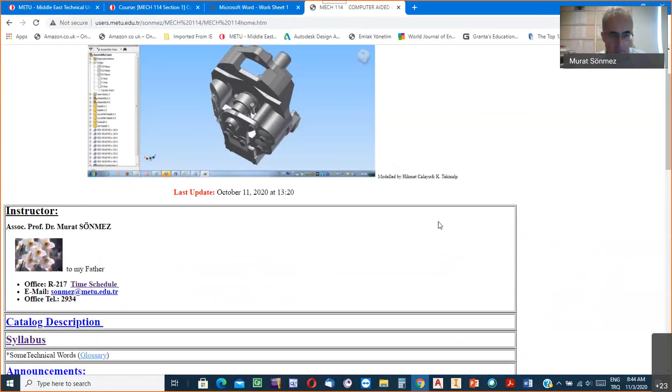Syllabus sheet, for instance. On the syllabus sheet there is a weekly program, showing in which week what subject is to be studied. Although in this table you see the chapter titled Sheet Metal Work is the last topic, in this table it is seen.

But last week I received a kind request from my elder students. They asked me, since during the summer practice internship in the company they worked on sheet metal works, and now they need to submit a summer practice report. In the report such works are to be explained, and at the appendix of the report the necessary drawings and developments are needed, and then they should be able to create the model of such works, the objects. These are in the jargon called sheet metal work.

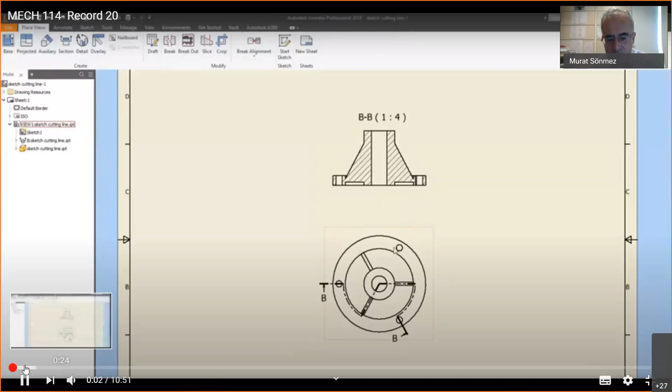No, not necessary, because the video records are accessible and available. No need to watch the video records in an online meeting under the control of Murat Hoca. But say this is a course.

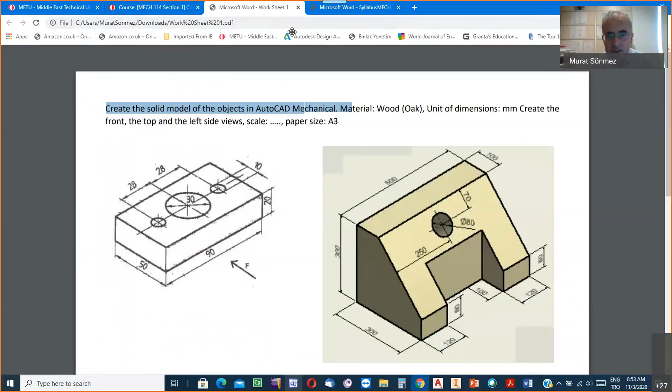It has in its catalog definition, you know, 4 contact hours. See the catalog definition one more time. ECTS credit 6, you know, 2 plus 2, 4 contact hours.

But since the course is a very crowded course, and unfortunately the university senate couldn't discuss its up-to-date content, some professors still think that engineering drawing, even today, is just the student using a pencil to draw projections - pen, paper, pencil drawing. Since they think that is the content, the main tool, the main domain, they say this credit is sufficient.

They don't know that we are using very commonly used professional software, and for students to be educated and learn the tools of such professional software, it requires extra time.

And since the student should learn the things not only in the first quadrant but also in the third quadrant, not only ISO standards but also American standards, the content is really crowded. Since 1989 it has been getting more crowded, but unfortunately decision makers have no idea about such content.

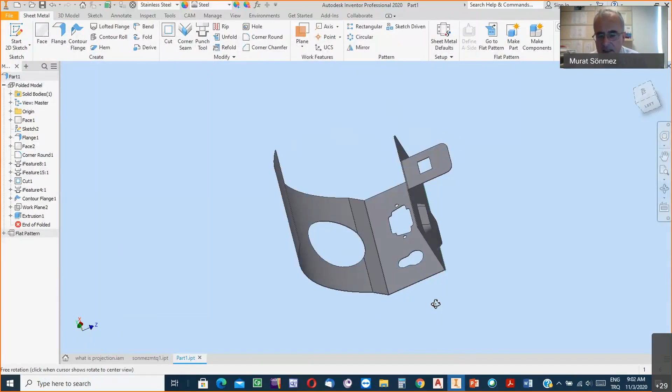Saying sheet metal work, let me directly give an example of what we mean. In Inventor, this is the model - a sheet metal work, it is a sheet metal work. This object in general may be a part of an automobile, or it may be used as a part of an aircraft structure, whatever it is. But in general it is called sheet metal work. In which case is an object called sheet metal work?

If it is the case that during manufacturing, first from the market or stock, you found in the corresponding stock size a rectangular prismatic sheet made of metal - most commonly we use steel. You found a rectangular prismatic sheet, take it, and put marks over the sheet. Then applying a punching process, create these empty spaces. Then using a press machine, create this feature, punch it. Then using the bending tools, bending machine, fold the sheet. This is a sheet.

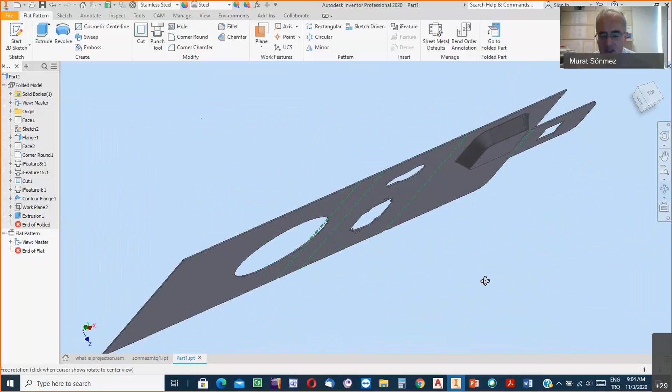By the way, when such a rectangular prismatic object is called a sheet, it is measured by the thickness. If the thickness of such a prismatic object with flat surfaces is less than 10, maximum equal to 10 millimeters, then it is called sheet. If the thickness of such a simple right prism is greater than 10, then it is called slab.

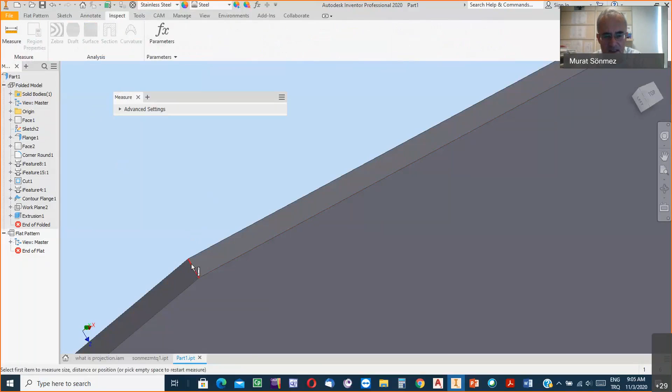Let's measure the thickness of this one using the inspection tool of Inventor. I took a digital ruler and indicated this - you see it is 0.5 millimeters, less than 10. It is no doubt sheet. Since in most cases the material is metal, we generate the key phrase.

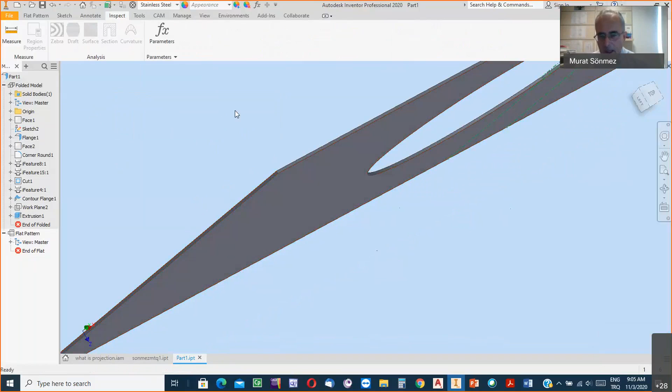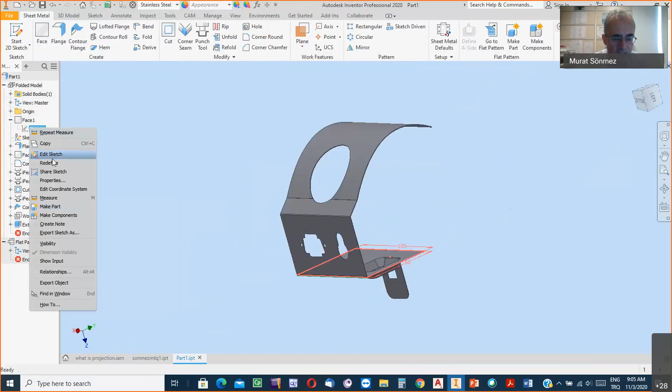We say sheet metal. If it is a sheet metal work, this means first, in the market or from the stock of the company, we found the initial shape. If you cannot see it, we'll help you using this 'edit sheet' option. First I should click on this button, and it will allow you to see the initial shape. Yes, from the market you found a rectangular prismatic sheet. Take the rectangular prism.

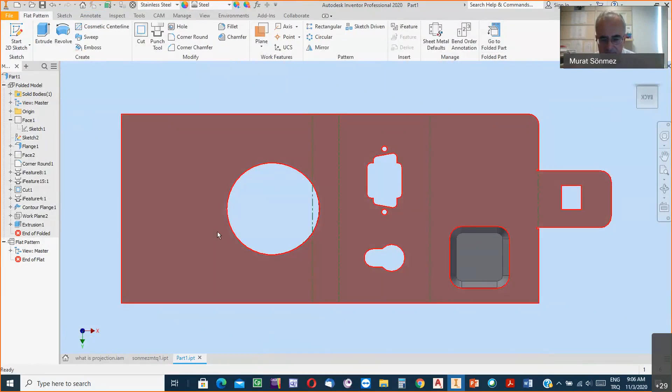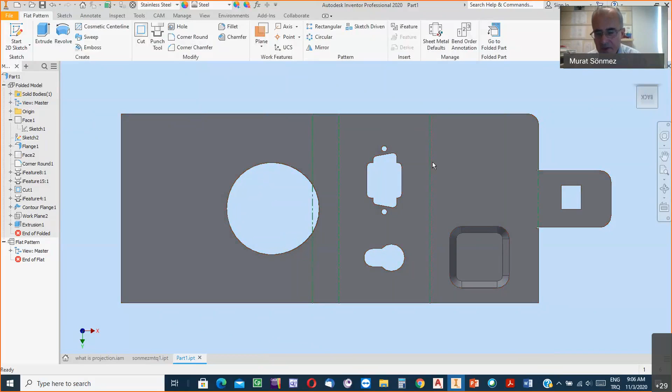On the surface of such a flat sheet made of metal - commonly steel - draw the necessary boundaries. For instance, draw a circle, draw this standard shape, using special pens, scribing the surface of the sheet metal, and mark these paths over the surface. Then tilt it and try to see the green lines.

These are to be marked by the technicians, operators over the surface of this sheet.

Then using folding machines, bending machines, obeying the common practice and recommendations, fold this flat sheet. For creating such empty spaces, use punch press, special punching tools, cut the sheet, and then have such empty spaces. After the punching stage, after having such empty parts and embossing such a feature, then it comes to the bending folding stage.

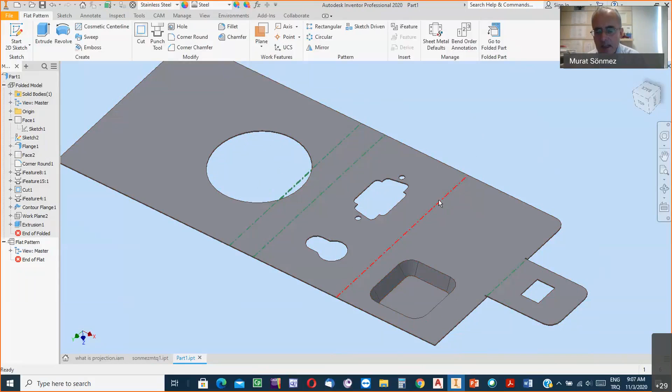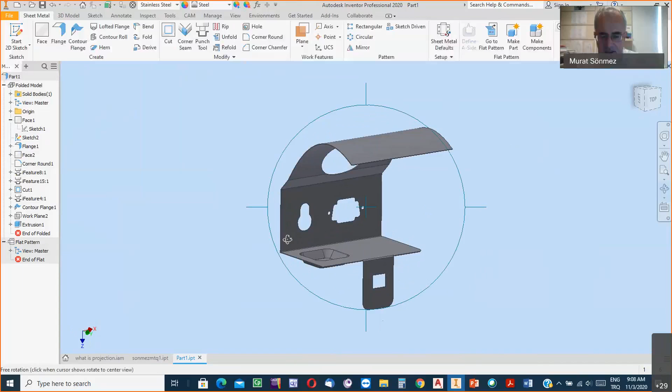Fold this flat sheet along such predetermined paths to have this object. If the manufacturing technology is the thing, find a flat sheet and then fold it to be able to have such a 3D object. Then, in short, we say that it is a sheet metal work.

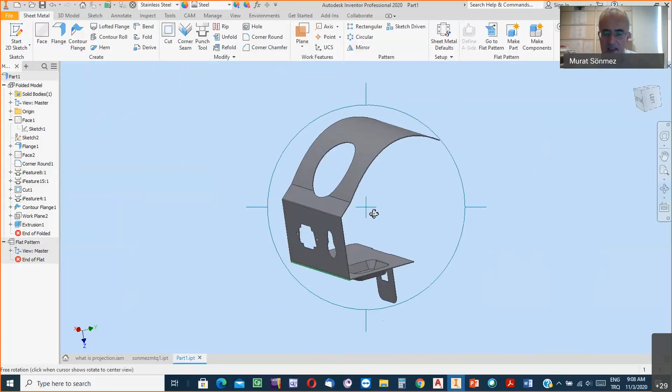The name of this object may be, for instance, a shield cover or something else. But in general, for any object manufactured in this manner, starting from a flat sheet and folding, just its shape has been set, finalized. It's called sheet metal work, my dear students.

And Inventor is a very powerful software. Just after finishing my lecturing part, I'm going to demonstrate how such a work can be created.

You see, along the ribbon, sheet metal ribbon, we have the tools for creating a flat part of the object, face, it corresponds to extrusion process. And for having such bended portions, flange tool, flanging tool, contour flange, cutting tool for cutting purposes. It corresponds to extrusion applied in cutting mode.

Seaming facilities, punch tools, rip tool, unfold, refold tools, folding facility, bending facility, hemming facility. And then this powerful magical button to be able to see the flat form of such a sheet metal work. Click on this button and then see the initial form of the sheet metal work.

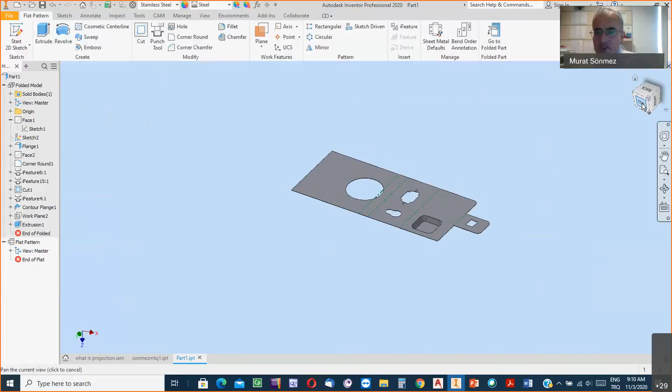And well, the technical drawing, the views of such an object. For instance, observe the object in which direction. This direction, say that this is the front view. Observe it in that direction, this is the left side view.

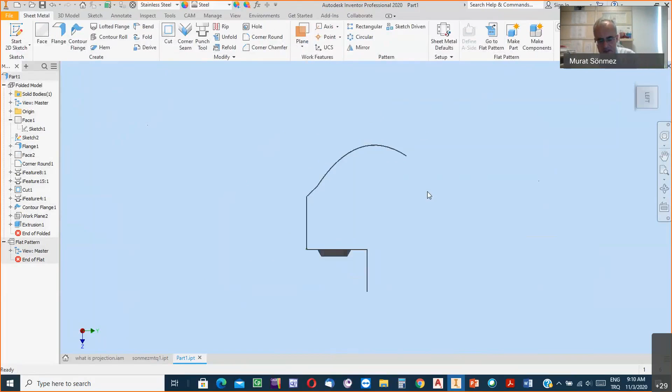These are the views placed on the engineering drawing sheet, on the surface of the paper, to inform the reader of the final form, the geometry. But the valuable drawing for the interest of operators, technicians, is the development.

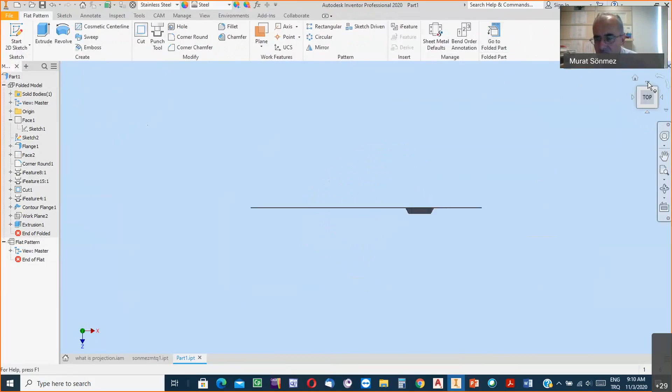Yes, the view of sheet metal work. It shows the sheet metal work as unfolded, and using such an unfolded figure, the figure shows the object as unfolded. Technicians can see the shape to have on the surface of the sheet metal, to scribe and necessary to punch.

Then draw this figure on the surface of the sheet, and while using the bending machine, fold it to have such a final form. So, the projection of the object that shows the object as unfolded is called, in the jargon, development.

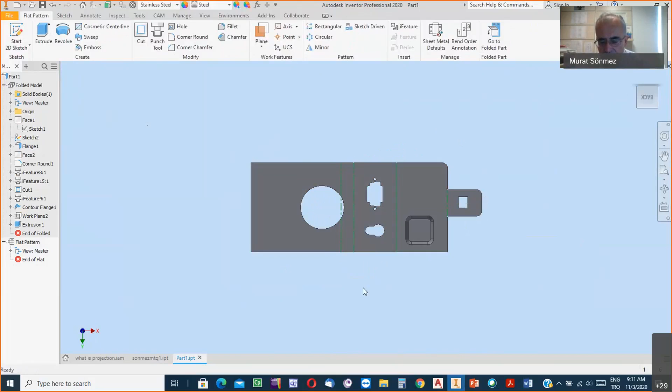Well, if I create the projection of this object right now, it is, you see, unfolded. Then, in general, the corresponding image will be the development. Now turn back to my presentation. Development means the projection of a sheet metal work, it shows the object as unfolded.

You can see on a development the unfolded appearance of the sheet metal work. A similar example is in this slide of my lecture note.

Well, in figure A, let's say, we have the object in its pictorial figure. It is just a pictorial appearance. And the next figure, we have its development.

This is the valuable projection, actually the valuable drawing, because it is the drawing to scribe over the surface of a sheet metal, and then along those paths, while operators using the bending, folding tools of the company can fold the sheet and set this form.

Well, here, draw the attention to this transition part, or to that transition part. Then, take a pencil, using the annotation tool of Cisco. This part, you see there is a round here, and along this edge there is a fillet.

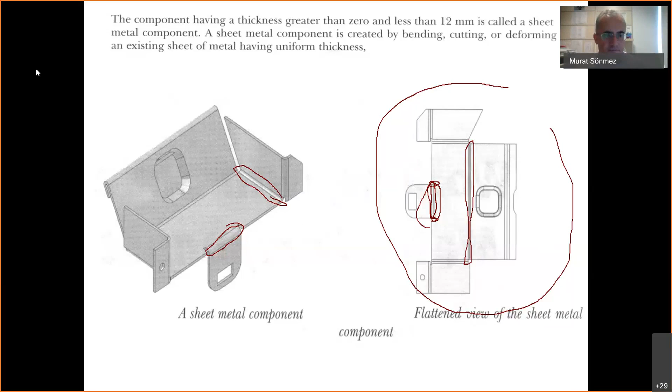Continue. By the way, I said 10 millimeters, but that should be corrected. A component with thickness greater than 0 and less than 12 millimeters is called a sheet. 12 is the threshold value. If the thickness is greater than 12 millimeters, do not call it sheet metal; depending on its shape, you may call it a slab.

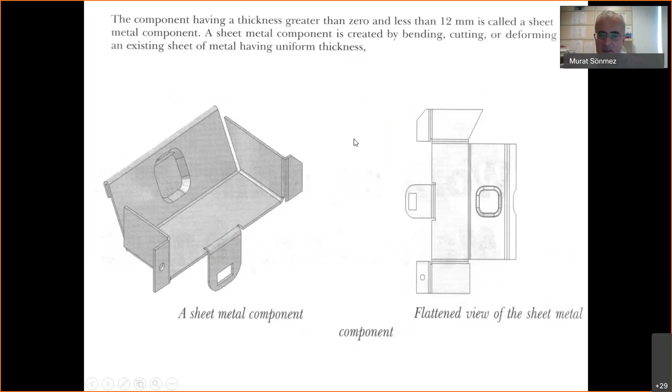A famous example: there is a box, for instance, a tea bag box. In my office right now, on the table, I have such a thing. Okay, fold it.

Well, the material, can you see? Okay, hide the registered mark of the company, otherwise it's going to be advertisement. Use the other side. First, at the beginning, what is that?

See, it is now a flat plane, a flat object. Its surface is flat, and it has boundaries, special in shape.

This figure needs indentation after folding to achieve such an object. Since it's made of carton, there's no need to use a press machine or folding machine. Applying bending forces using my thumb and finger, muscular force is sufficient to bend them. What I'm doing is folding. Fold this, along this path, fold, fold, fold, and then finally, what is that? It is a box, a tea bag box.

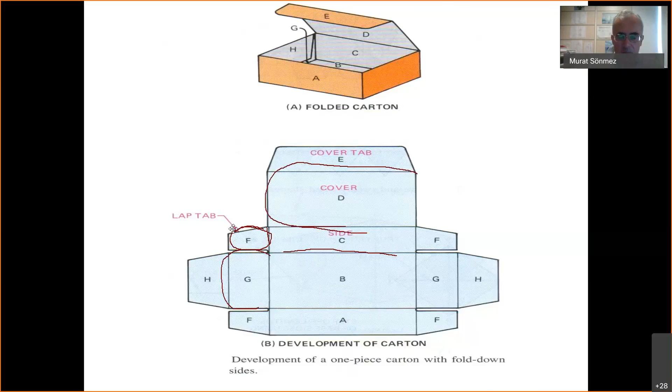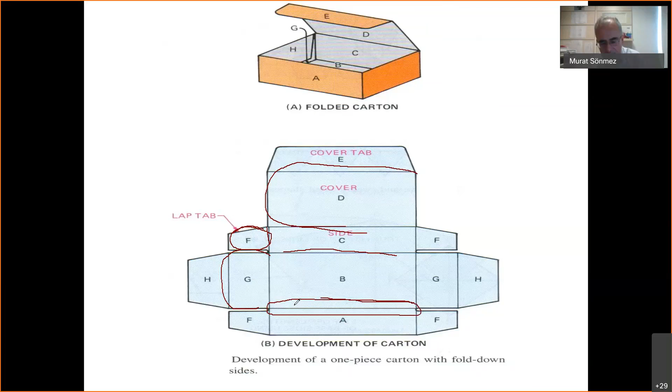If we consider that these are needed, and if the thickness of the sheet is greater than a certain value, we need to consider extra space, which is required. Otherwise, the bending radius might be very little, and along this edge, atomic bonding forces may lose their values, the material may lose its strength, and then along the edge we have lots of cracks, and then splitting occurs.

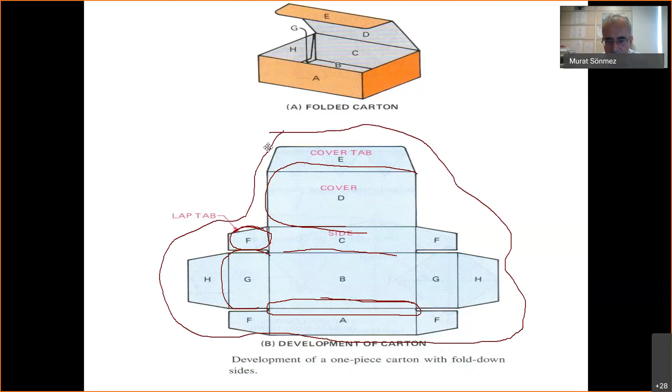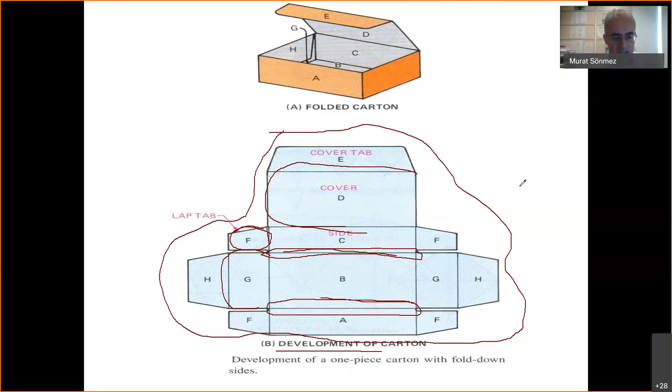Another well-known example: you need to have a piece of tube or pipe. How can it be manufactured? One method is deep drawing. The other method is sheet metal work.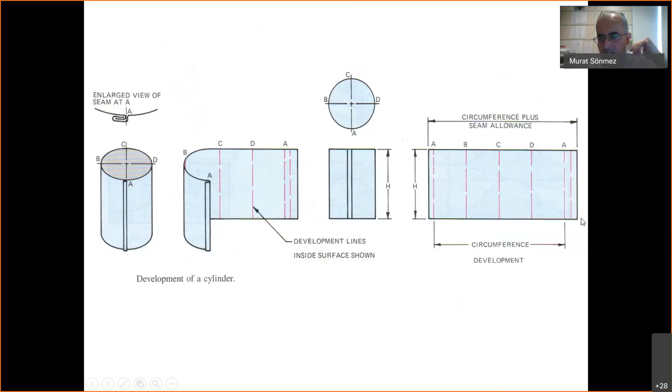Furtherly folding along this edge, the sheet metal, it is called seam allowance. The inventor calculates the corresponding area, and then when you ask the development to have such an allowance, it is to have such a seaming.

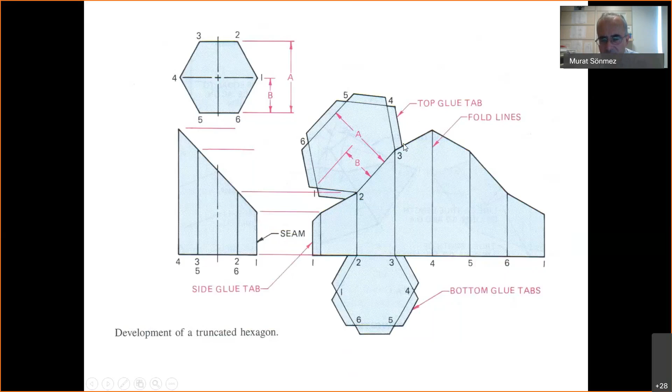Another example: you need to have a hexagonal sheet metal work of this figure, closed at this end and at the other end. What should be the figure to draw over the sheet metal before the bending stage? Here is the answer: these are glue tabs for gluing additional extensions, and these are the paths along which the sheet metal is to be folded.

Another example, a loft. What is the case in this example? Take a pencil.

For instance, imagine it is an air conditioning system. We have a channel over here, rectangular prismatic. The preceding part of the system has another channel, but the cross-section of the channel is to be decreased to increase the speed of flow. If you decrease the cross-section, the flow velocity increases. The geometry is changing from here to there, gradually decreasing.

To connect this part of the system to the rest, it is necessary to use such an adapter. In this example, the cross-section size is changing from beginning to end, though the geometry itself is not changing, only the size of the cross-section is gradually decreasing. But the most difficult case is when not only the size, but also the geometry is changing.

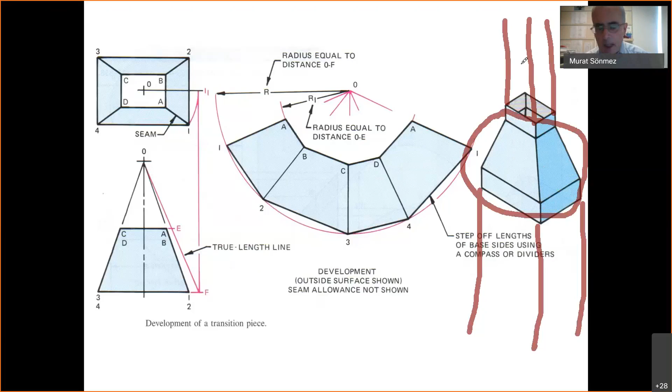For instance, the preceding part is a rectangular prism, and the following part is a pipe, cylindrical in shape. So the geometry will change from here to there gradually, from rectangle to circular. In MECH 113, giving an example about the loft process, I mentioned such things, but here, under the title sheet metal work, the loft is to be a sheet metal loft.

How can it be created? For this example, say that this is the front view, this is the top view of the loft. Which figure is needed on the surface of the flat sheet, at the end of the folding, to have such an object? Here is the answer.

Referring to these orthographic views and applying the revolve process. This is an intersection. To have it at true length size, imagine that while holding the rest of the body, you're rotating this intersection, as illustrated here with such a circle. Imagine this intersection as if rotated in this direction, and then that intersection became parallel to the picture plane of this view. Then, in orthographic projection with figurative distortion, the length of this intersection is equal to that much.

But after the revolving stage, the true size value of this intersection is over there. This line is the revolved image, the image of this intersection after the revolving stage.

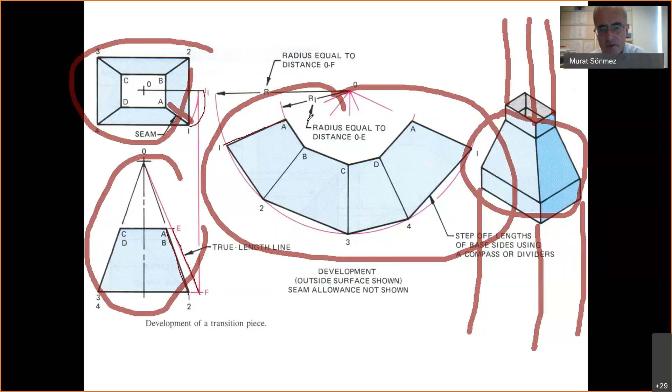Using the revolved figures, the projections after the revolving stage, then draw the development. This is distance A2, A1. A1 is to be in true size. Drawing the development, it must be in true size. But from the given orthographic views, you cannot directly obtain the size of this feature, because by definition intersection A1 is an oblique line.

One technique is the auxiliary view. For this inclined trapezoidal surface, you can create the auxiliary view, and on the auxiliary view you can find the true size image for this boundary. The other technique is revolving: imagine such a revolving stage and make this oblique line parallel to the picture plane of this projection, and then see the true length size, and transfer the value to the surface of the sheet through this boundary, and the others as well.